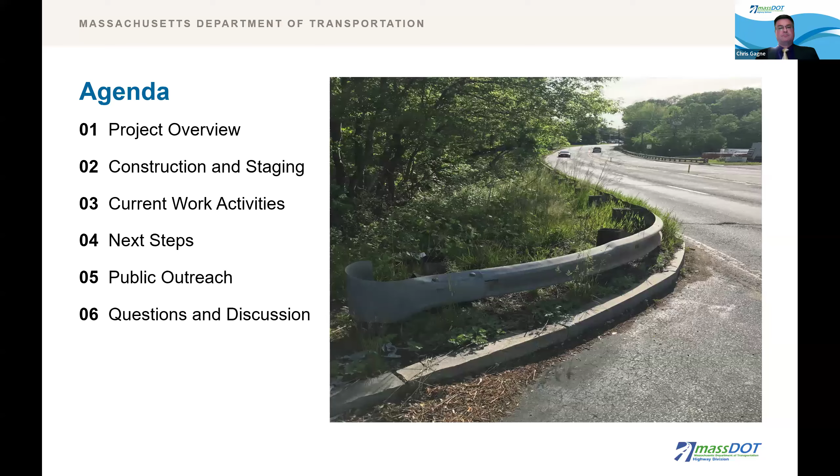The team for this project consists of staff from the Mass DOT Highway Division and the Design Build Construction team. Again, my name is Christopher Gagne from Mass DOT's Major Project Section, and I'm the main project manager for this project. Joe Frawley is the operations engineer from the District 3 office, which is responsible for overseeing the construction of this project. The resident engineer from our district construction section is Claudian Polisi. The design team consists of a contractor who is responsible for constructing the project and a design engineer who is responsible for finalizing the design.

Peter Pavao, the project manager from D.W. White, will speak later about the construction staging and activities. Amanda Poppenberg from Regina Villa Associates will discuss how we keep you informed about the project. We have Lenny Velichansky, the design manager from TranSystems, and Jonathan Nero from Beta Group, available to answer any questions that come up regarding the design or environmental permitting process.

How did we get here? Some of you may have joined us when the MassDOT team met with the public in May of 2021 for the 25% design public hearing, and/or the previous public information meetings last year in February and May of 2023.

Since this project was advertised as a design build project, the steps since the public hearing were different than for many MassDOT projects. The project was advertised for design build in April of 2022, and teams that combine contractors and designers submitted proposals and bids. Once the project received a notice to proceed in November of 2022, the selected team of D.W. White and TranSystems was able to prepare to begin early construction activities while refining and finalizing the design.

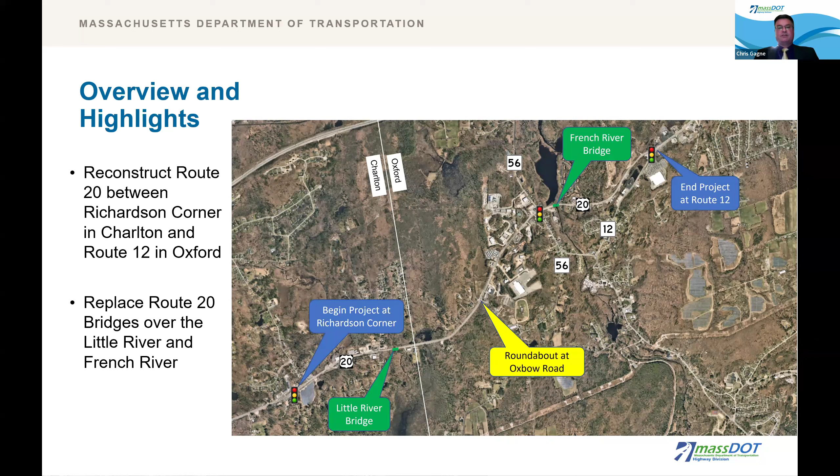Construction overview. The original time frame for this project was approximately 4 years. The previous anticipated date was November of 2026. With some early achievements and planned lane closures, which I will explain in a moment, we now anticipate completion in fall 2025.

D.W. White typically performs most of their work during the daytime hours. Typical work hours are from 7 a.m. to 3:30 p.m. Some work may vary depending on traffic volumes between 5 a.m. and 7 p.m. There will be occasional night work and weekend work for some demolition and off-peak work.

that need lane taking to execute the work. We will always maintain access for emergency services. We will be in contact with all first responders to maintain communication throughout the contract.

Here are some ways we will mitigate construction impacts, including confining all major operations to fixed work zones, minimizing construction vehicle turning movements within the project limits to reduce congestion, reducing travel speeds throughout the work zones for the safety of the workforce and the traveling public, and using water spray for dust suppression throughout the project.

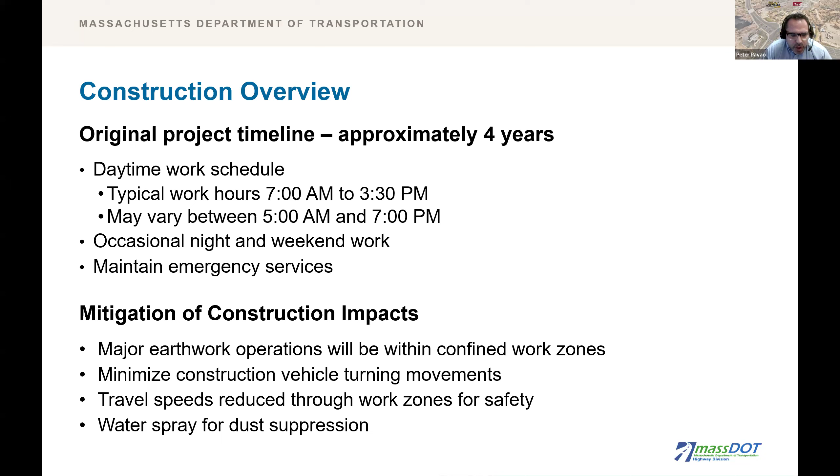We recently achieved 2 major milestones. First, the utility pole relocation had an original baseline schedule of 3 years, but we were able to complete it in 2 years, eliminating a phase. This will enable us to accelerate the completion of this project.

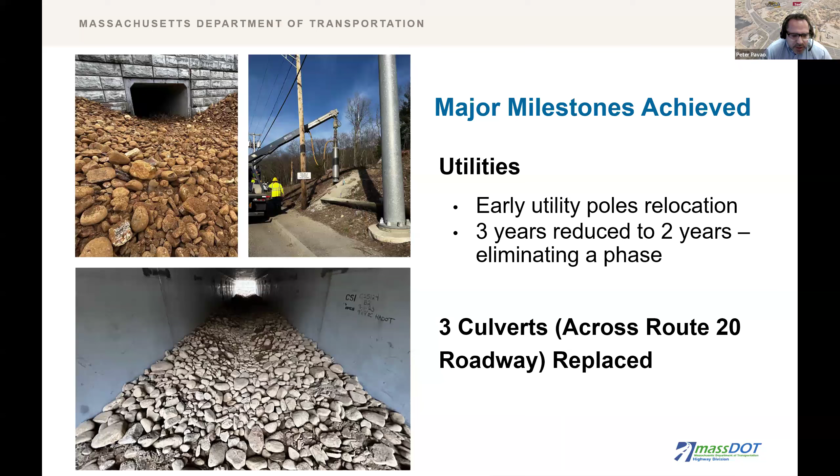We also replaced 3 culverts across Route 20 late last year. We appreciate everyone's patience while we had to detour traffic to complete the work. These major milestone achievements allowed us to revise our accelerated schedule.

Temporary lane closures: starting March 4th through November of this year, we will reduce Route 20 to 1 lane in each direction between Richardson Corner Road and Route 12. Please note, this is a change to what we previously presented. We will maintain access to local businesses and existing turn lanes with U-turns at Route 12, Route 56, and Richardson Corner.

Side streets and driveways along Route 20 will be restricted to right turn only. To accommodate traffic that wishes to change directions, U-turns will be allowed at Richardson Corner, Route 56, and Route 12. Additional lanes may reopen as sections of work are completed, and at the end of the construction season, we will return the road to 4 lanes throughout the corridor.

While we understand there are traffic impacts as a result of one lane in each direction, there are benefits. The traffic setup will allow us to complete the project 10 months earlier than originally planned. That means the project will be substantially complete in 2025, with only finish and cleanup work remaining, barring any weather or unexpected delays.

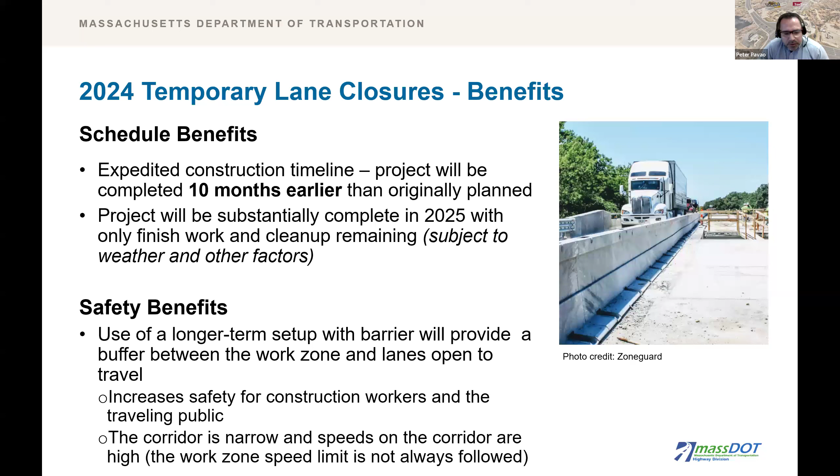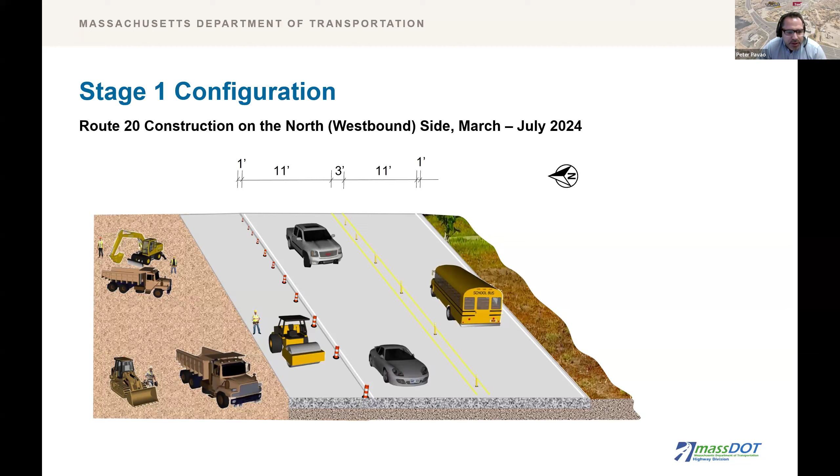Stage 1 configuration: this shows the lane setup from March through July of 2024. Construction of the westbound side of the roadway will take place while traffic is permitted on the eastbound side of the roadway.

Stage 2 configuration: this shows what the lane setup will look like from July through November of 2024. Construction will move to the eastbound side of the roadway, while traffic is permitted on the westbound side of the roadway.

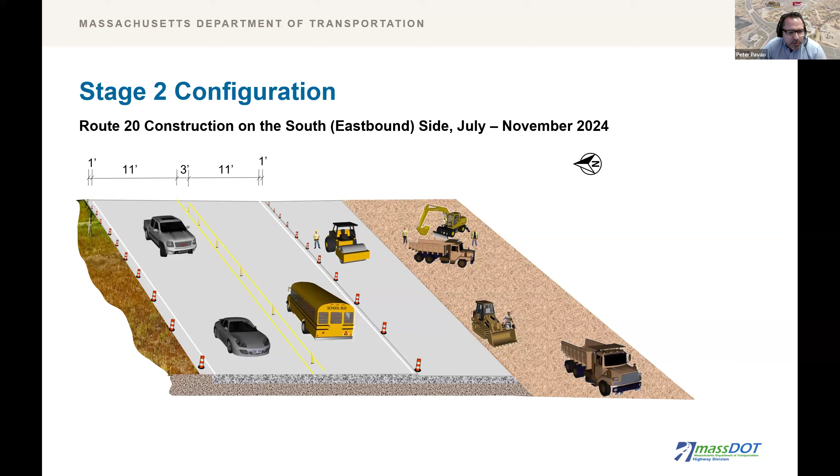Wide loads prohibited from work zones. MassDOT will continue to implement restrictions prohibiting vehicles carrying wide loads over 8 feet 6 inches on Route 20 between Route 12 and Richardson Corner. The restrictions will remain in place 24 hours a day, 7 days a week, throughout the lane closures. We will continue to coordinate with businesses inside the project limits on their wide loads. Any vehicles carrying wide loads should avoid the work zone, seek alternate routes, and contact MassDOT's Commercial Truck Permits Office for more information.

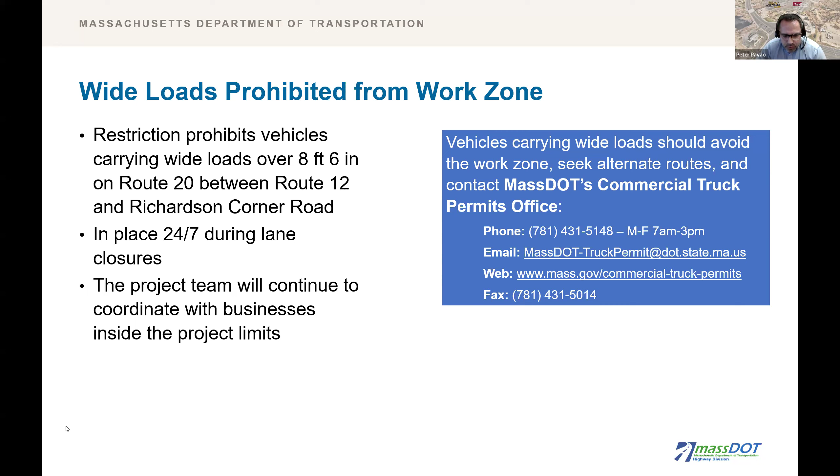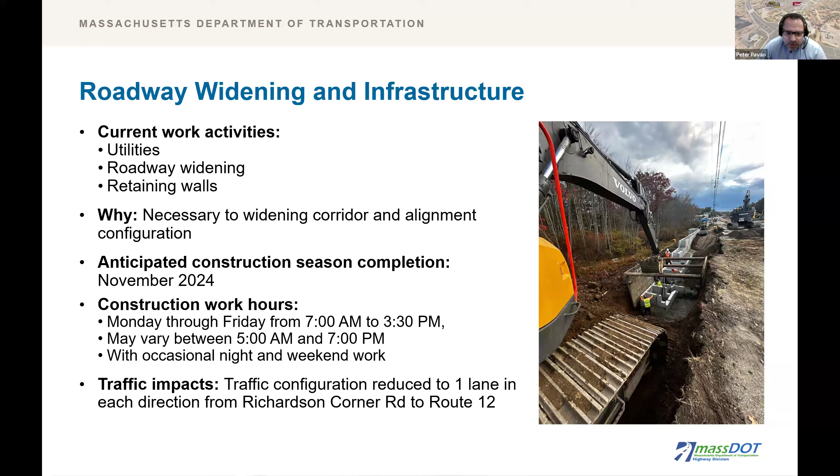Now I will hand it over to Chris Gagne to discuss next steps. After tonight's meeting, the next steps are to begin the lane closures on March 4th. Construction activities will continue through November this year, and the lanes will reopen in December. We will continue to provide the public additional information as construction moves forward. We anticipate the construction will be substantially complete in November of 2025.

Now I will hand it off to Amanda Pogenberg from Regina Villa Associates to discuss how we will keep you informed. Hello everyone, my name is Amanda Pogenberg with Regina Villa Associates, and I'm working with the team on public outreach and communications for this project. The public outreach team is assisting MassDOT by implementing a timely and informative outreach program. We want to make sure you and other stakeholders are aware of the project and receive timely updates to help you plan your participation and choose how to follow the project.

We maintain a robust email database, including key contacts from regional and local organizations, municipalities, and elected officials. Those contacts, and anyone else who signs up for our emails, will receive updates on a regular basis before key project milestones and in advance of construction activities and traffic impacts, such as the upcoming construction phasing shifts. We will also continue to keep the project website updated with information and announcements.

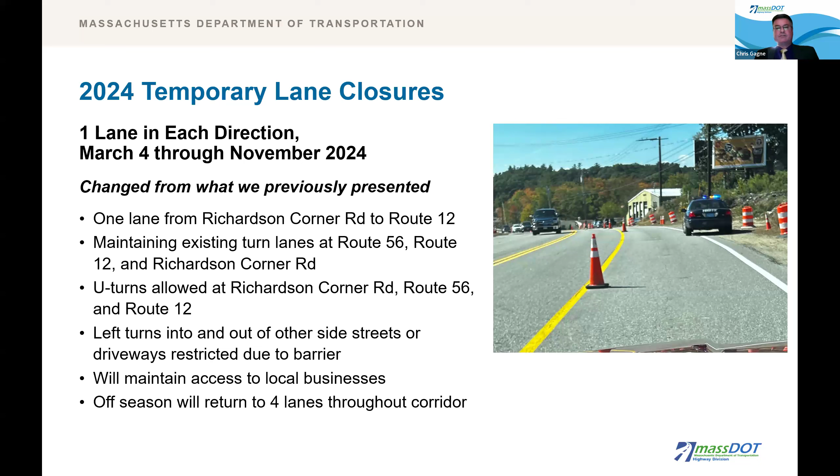We have a follow-up comment from Gary saying that the section of roadway we were talking about will turn into a race from the roundabout to Richardson Corner. There's still time to make things right in this project. The right turn is what causes accidents. So thank you for that, Gary, I'll take that into consideration. But like I said, this meeting is to discuss the construction. So thank you.